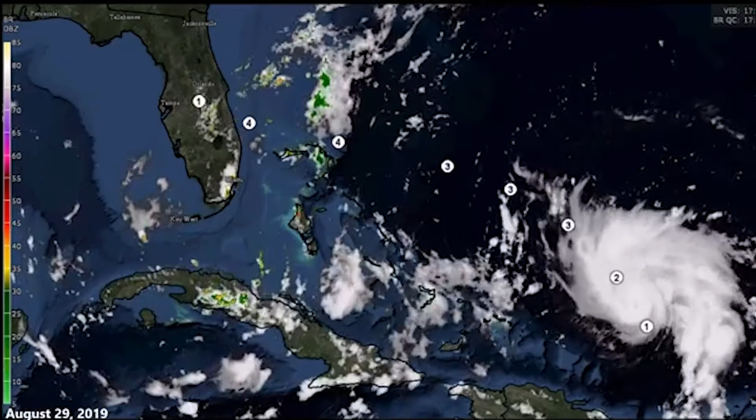Our planet has gone through immense changes in the last 50 years. The ice caps have fully melted, water levels have risen 20 feet since the year 2000, hurricanes are more frequent and powerful, and uncontrollable wildfires continue to burn up ecosystems. There is no longer a frost season, soil moisture is at an all time low, and droughts and heat waves plague our cities and towns.

Every year yields fewer and fewer crops and unhealthy livestock, leading to an oversaturation of the synthetic food market and an increasingly hungry population. If our planet continues on this downward trajectory, our Earth will be fully uninhabitable by 2060, only 10 years from now.

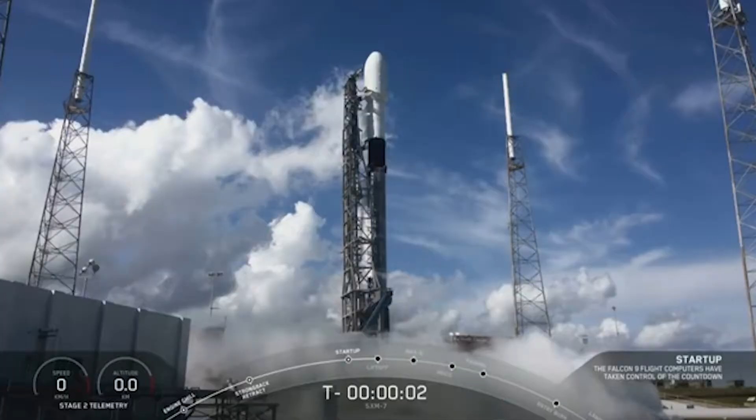While efforts are being made to colonize other planets in our solar system and beyond, we do not have the infrastructure to accommodate the mass migration of our entire population. Therefore, we have made strides to address the problem of climate change as it is on our planet Earth.

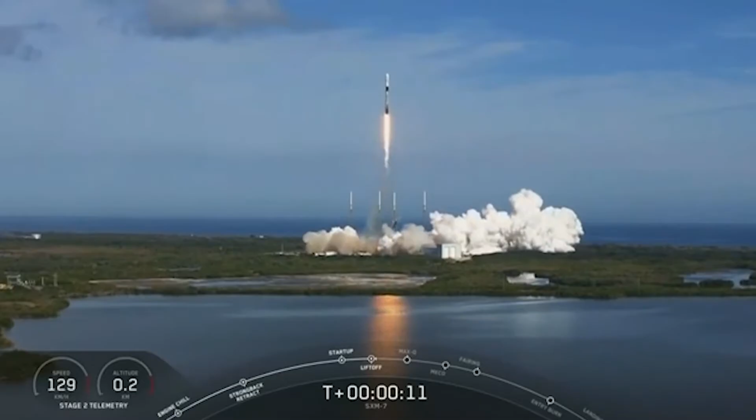Before the grand unveiling, let us first set the stage for our design problem and solution. As previously mentioned, and as you all have experienced, the effects of climate change in recent years have been rampant. The GEA was established 20 years ago at the 2030 United Nations Framework Convention on Climate Change.

One of our main goals has been to establish standards for energy loads produced by each country. While we have held countries and their citizens accountable for joining our coordinated effort to lower our global carbon footprint, these efforts simply have not been enough to reverse the effects of global warming.

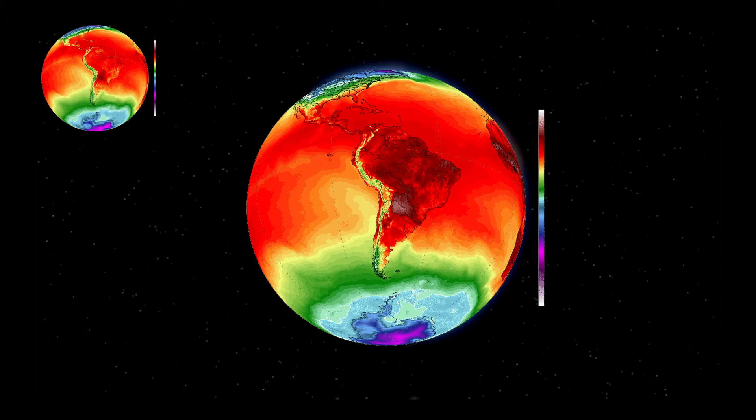The following map represents the average yearly temperature from the year 2000, 2025, and finally 2050. The data makes it clear that our efforts have simply not been drastic enough. We need a total climate overhaul as soon as possible.

Our team of top scientists, engineers, architects, and meteorologists have been working tirelessly to develop a permanent solution through countless hours of meticulous research and journaling.

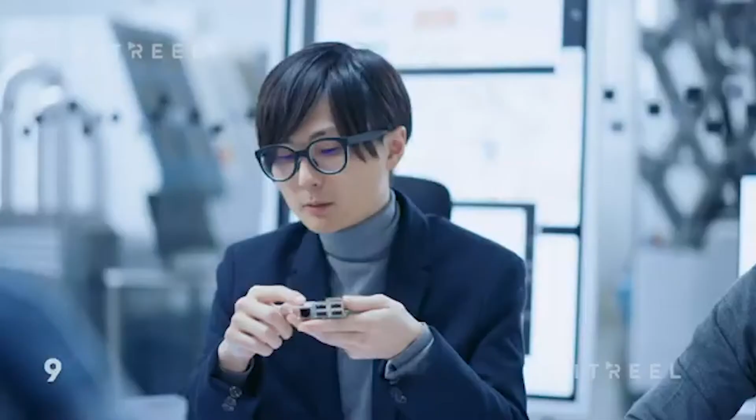On January 17, 2048, our database of literature and references provided a source of inspiration that held the answers we were looking for and set the stage for our research. This source was an old architectural text, The Architecture of the Well-Tempered Environment by Reyner Banham.

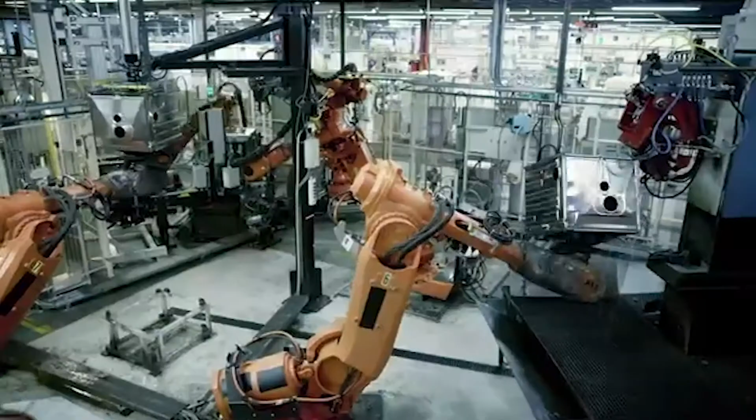Our team discussed how we could use architecture to temper our ever-worsening environment, and we found that some inspiration lay in a certain chapter, Towards Full Control. As we read Banham's account of the history of air conditioning, from an industrial to a residential scale, we understood what had to be done.

We needed to take technology that we already had, but apply it on a larger scale. While we had been so focused on creating rules to limit the use of air conditioning on a residential scale to cut down on energy consumption, we never considered air conditioning to be a solution to our problem.

Without further ado, we are pleased to present to you our solution to the global climate crisis, the CAC 2000XL, or the Climate Conditioner. Over the course of 5 years, and with a budget of 15 trillion American dollars, our agency will be overseeing the production and installation of these climate conditioners around the globe.

The organization will be based on a grid system, with each unit covering a climatic radius. While the technological components are similar, these machines are more than just the big brother to your household air conditioning unit. They will be placed in cities to help with smog control and air filtration.

This will vastly improve city life and allow for citizens to spend more time outdoors in the various metro parks. You will also find them in mountain ranges to revive snow accumulation and glacial production to account for the immense loss of glacial formations in the northern and southern poles of our planet.

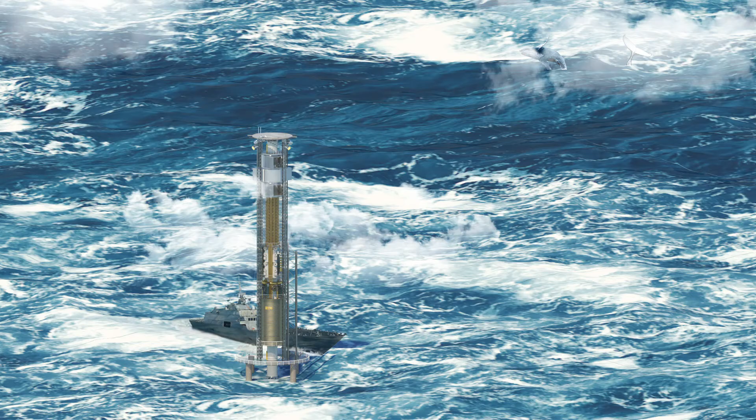You can now break those 20-year-old skis out of the closet. Offshore units placed at sea will play a huge role in alleviating the damage caused by hurricanes every year. These units will create miniature storm systems used to intercept and divert larger storms bound for coastal areas. These are merely a few examples of many applications of our climate conditioners to make our planet a better place. So how do these climate conditioners operate?

At the very core, these machines work in the same manner as any other air conditioner. A fan system pulls hot air from a condenser to the outside. The condenser, or heat exchanger, is the coil system that deals with the hot refrigerant. The first expansion valve restricts refrigerant flow. By reducing the pressure of the refrigerant, the temperature changes from hot to cold.

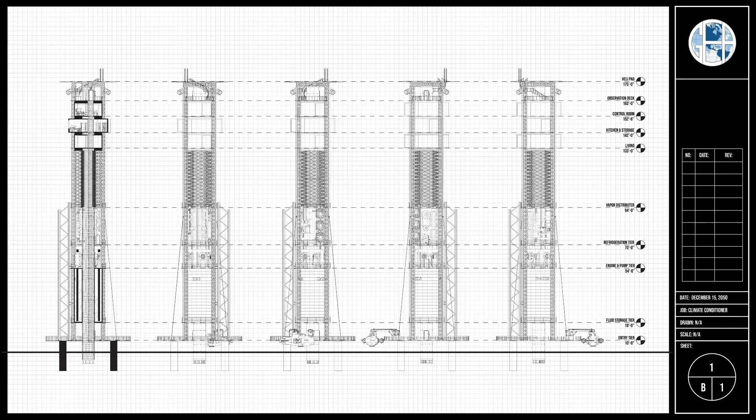The evaporator is the coil system that handles the cold refrigerant. The blower pulls room temperature air over the cold coil and disperses the temperate air. During this process, the refrigerant turns from a liquid to a vapor. The compressor and the second expansion valve work to raise the pressure of the refrigerant from low to high. As the high pressure vapor cycles through the condenser, the refrigerant becomes a liquid, as it was at the beginning of the cycle. What sets this unit apart is the scale of its components and cycle.

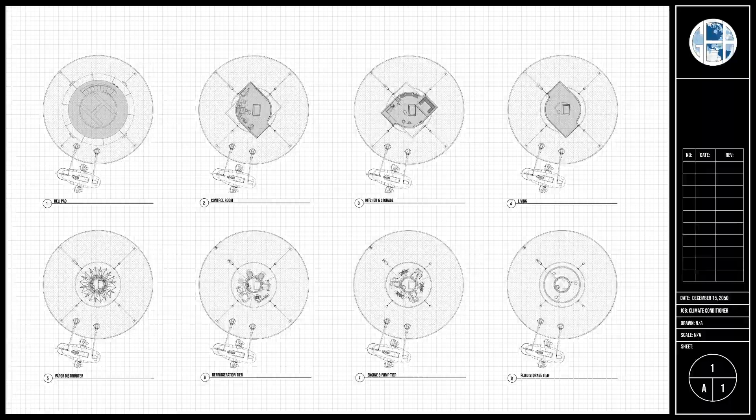It runs on a quadruple refrigeration process to accommodate the massive load required of it. While this explains how it controls temperature, how does it handle vapor distribution and air filtration?

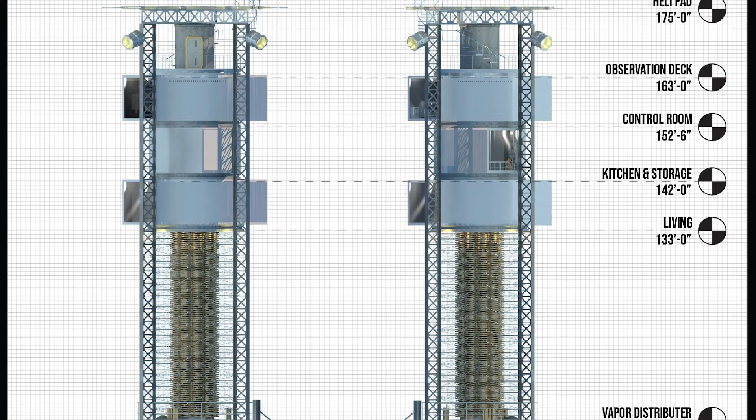These machines rely on the method of cloud seeding to control weather in their zones. Instruments on the roof provide meteorological readings and inform the machine's output load at any given time. A mixture of calcium chloride and water is created from the fluid cistern. This fluid is pumped up to the refrigeration tier by way of three 1,000 liter per second capacity pumps. These pumps and other operations are powered by three industrial-grade electric engines.

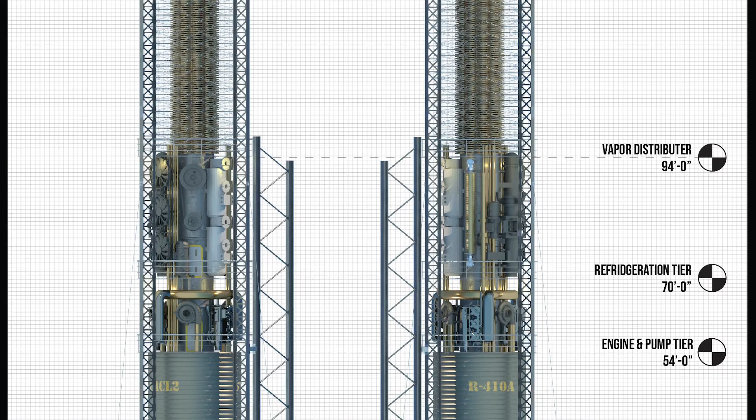When the mixture is fully prepped, it is dispersed out of the pressure vapor nozzles at a rate that sends the particles into the local atmosphere. These particles accelerate cloud condensation. The output cooling temperature of the unit can control whether this condensation is in the form of rain or snow.

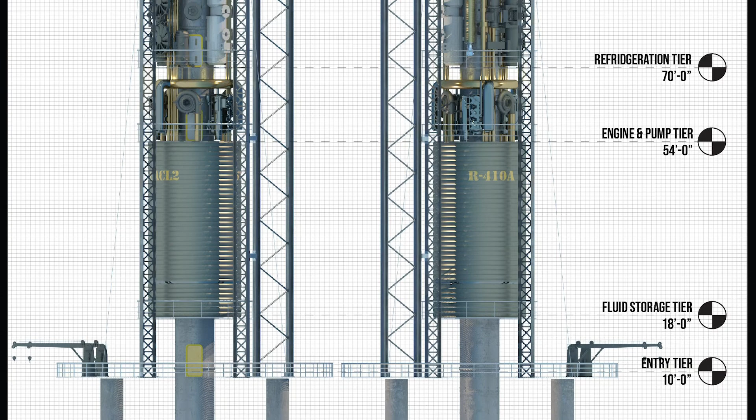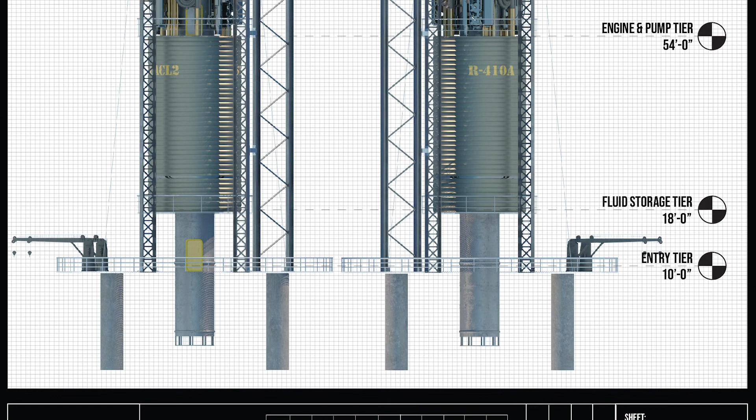And how does this machine clean air? A collection vent pulls dirty air into a Calvin cycle coil. This coil turns dirty carbon into energy by converting it into glyceraldehyde 3-phosphate. Supplemental energy from the grid will allow for the transformation to 3-phosphoglyceric acid, which can then be converted to ribulose bisphosphate. This process will be used to power the operations of the machine as it continues to filter and distribute clean air. Oxygen output fans will distribute the clean air for us to breathe.

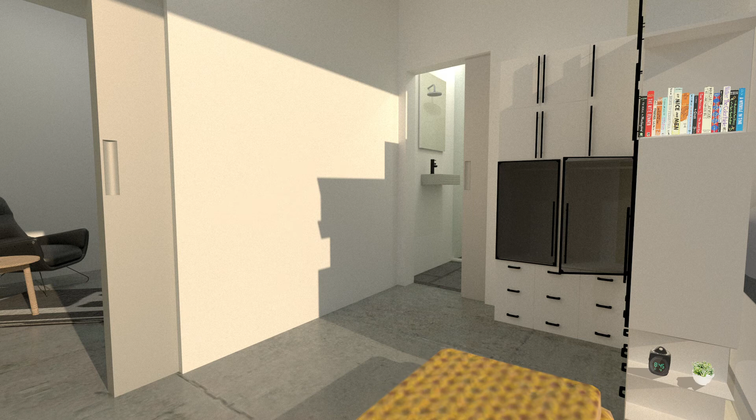And how do these machines stay running? We rely on a duo comprised of an engineer and a meteorologist to man each station. This job requires that each team study weather charts, complete routine checks of components, facilitate any maintenance, and oversee daily operations. The housing accommodations include a personal cabin and bathroom for both team members, as well as a kitchen and dining tier, and a control and workroom. A walk-in fridge and ample storage allows for up to a year of unassisted living, as it is imperative that operators have all needs met in remote areas that are not easily accessible.

We thank you for listening to our video, and hope you are as excited by this prospect of climate conditioning as we are. In as early as 5 years, we can expect to regain an adequate quality of living on a global scale.